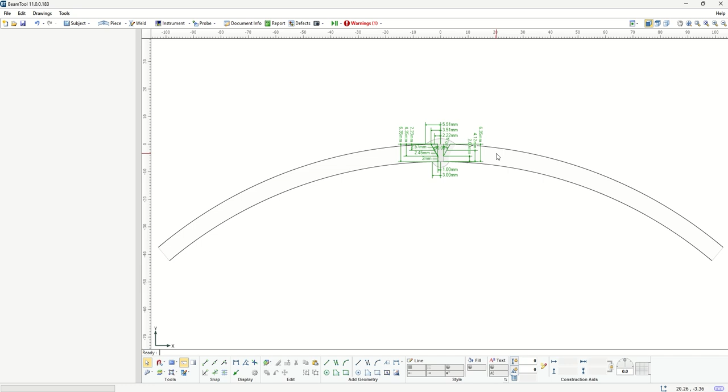In this video, we want to review together the preparation of the scan plan for phased array inspection of a single V weld in a thin wall axial piece, which can represent seam welds in basically small thickness pipeline.

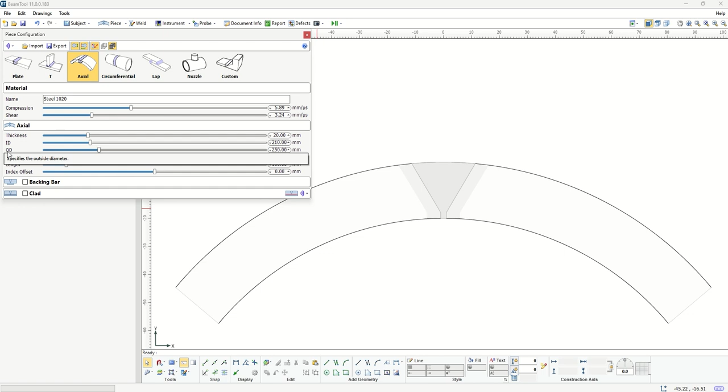As always, we're going to start by going to the piece and defining our piece. When we click on that, we have an option as a default to choose an axial piece. When we choose that, the dialog here will give us parameters that can help us to define our piece. Specifically for this example, I want to choose the OD, the outside diameter of my piece or pipe, to be 320 millimeter. And then I want to make it a thin wall, so 6.35 millimeter would be the

thickness. You will notice that when the outside diameter and thickness are set, the inner diameter is automatically set based on these two values. Next, there's a sweep here of 80 degrees. That basically is a choice of how much of this axial piece we want to show. For instance, I can go to 180 and show more, but in this case 80 degrees would be enough to show that it is a curved piece and will have enough room for my wedge to sit. So I'm happy with this selection.

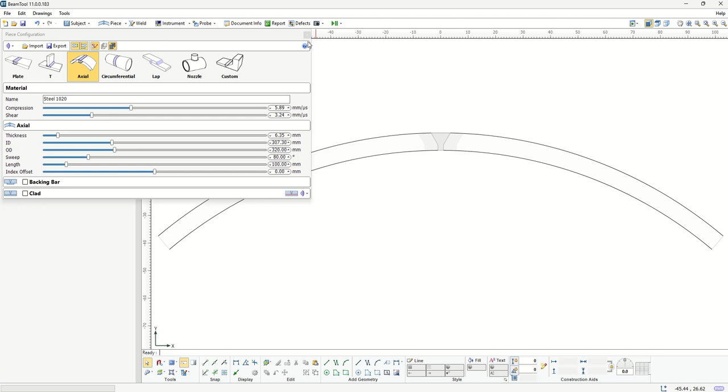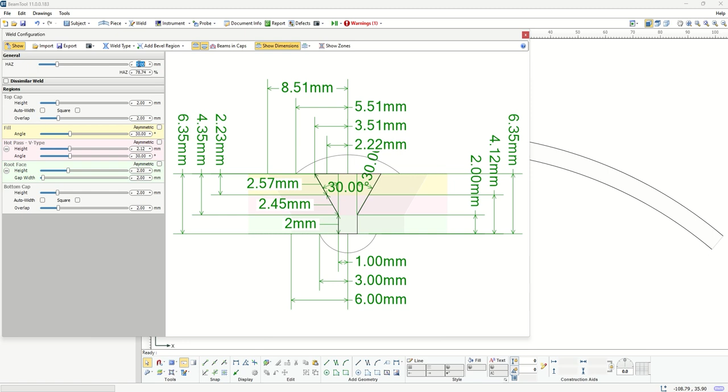Then I go to the weld, and in this case, I don't want to make many changes to the dimensions. I'm happy with the 30 degree bevel, and we have a 2 millimeter by 2 millimeter root. I can turn on the dimensions here so that I can see all the dimensions on the weld. But what I want to do is add a cap here, top cap and bottom cap, and change the overlap slightly. And also I want to modify the HAZ to be smaller, this gray area parallel to the weld bevel. So now that I've defined the piece and the weld, the next step would be to

add a probe. Here I add a phased array probe. The default probe and wedge that we always see in BeamTool appear here on the piece. But one thing you will notice is that it's already pinned to the OD of the piece. So it seems BeamTool already knows that you're inspecting a curved piece. The bottom of the wedge is curved, and you will also see here an option that by default the wedge is pinned to the OD.

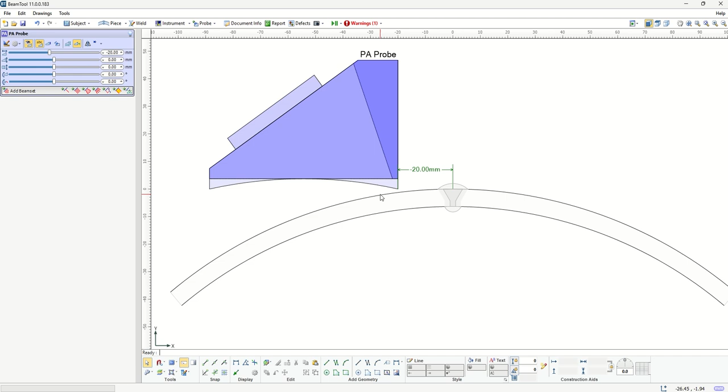If you select no pin, it's not pinned to the OD, but still the curvature underneath the wedge matches the curvature of the piece. So obviously in this case we will choose that it should pin to the OD. If we go to the details of the probe and wedge, again we have our default probe with 64 elements, pitch 0.6, and our wedge essentially has the same parameters as the default, but as mentioned before, now by default the bottom of the wedge is matched to the piece.

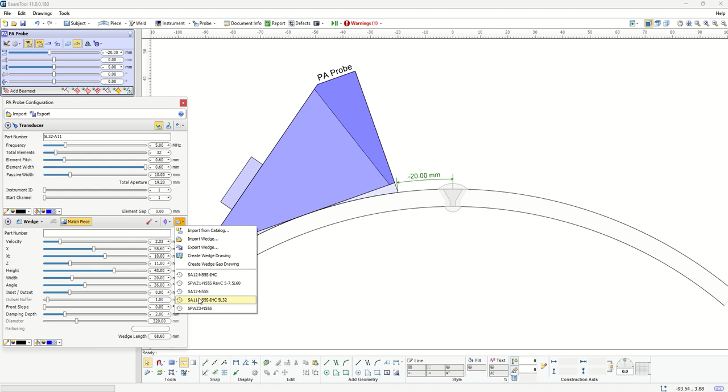So now, again, I can make changes to the probe and wedge. Since it is a thin wall and our weld is a small weld, I'm going to choose a smaller aperture probe. In this case, my choice is the 5L32-A11 probe from Evident, which is 32 elements, 0.6 pitch, and I'm also going to change my wedge to SA11-N55S. And again, you will notice that although the length is now smaller, the bottom is again curved.

Now, as usual, what happens next is to define a beam set. I want to choose a sectorial beam set again. If this was a flat piece, my train of thought would be that this is a 30-degree bevel, so I want to go somewhere around 10 degrees from the normal, and 60 degrees is normal to this bevel. So something between 50 to 70 would probably be good. But the first question that comes to my mind is: what am I actually specifying here?

When we had a flat piece, it was clear to us that any angle that we choose here for refraction angle will be with respect to the bottom of the wedge, as the normal to the piece was the same as the normal to the bottom of the wedge because they were both flat. But here, in fact, what is the angle that is being generated? What is the reference of that angle?

And that's what you will see a hint here: BeamTool tells you that the beams are being corrected for the curvature of the piece. Some instruments may or may not support this, or support it in a different way. If you have an idea of what instrument you want to use, this is an important thing to pay attention to. So if I click on more info, we can read a little more about this axial configuration.

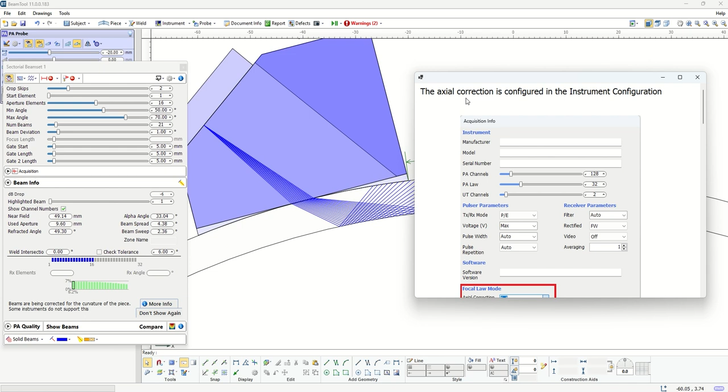In fact, in the axial configuration, we need to do beam correction based on the angle we choose and the curvature of the piece we have. The options for correction are no correction, full, or partial. This is with respect to the reference that has been used to generate the angle that we ask BeamTool to create.

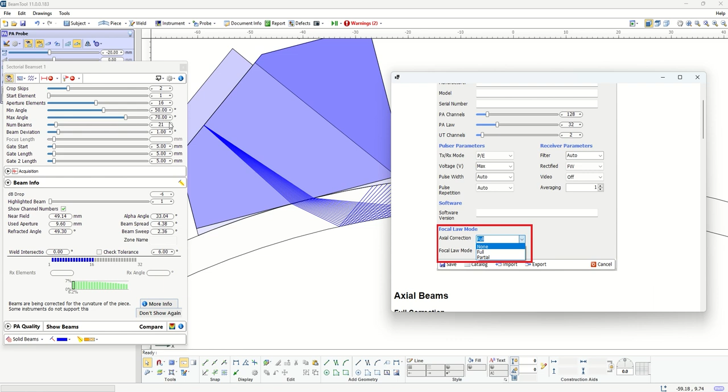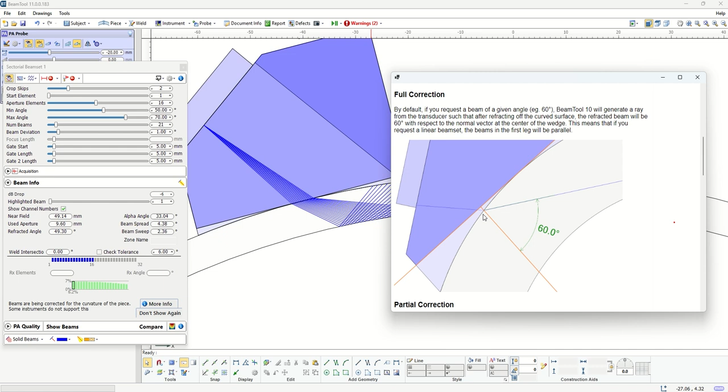With full correction, the reference will always be the flat line at the bottom of the wedge, and a normal to this flat face would be the reference. So if you say you want to create a 60-degree beam, BeamTool is going to draw a flat line to the extent here, which you also see in this image, and then with respect to the normal to that, your angle would be 60 degrees. Now, this is a little bit counterintuitive.

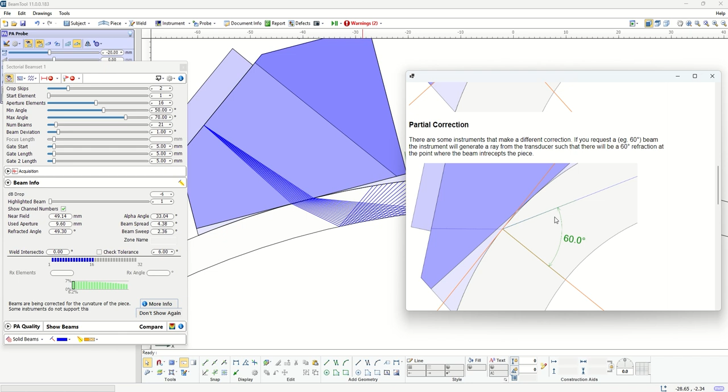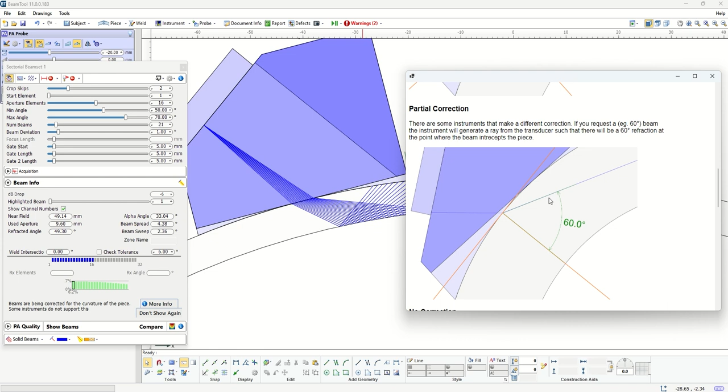What can be more intuitive, closer to what we expect from Snell's law, is partial correction, where the beam is generated with respect to the local normal at the surface. So if this is a beam exit point, we have a normal to the surface, which is a line along the radius of the OD arc, and our refraction angle would be with respect to that normal. That's what, in most cases, we prefer to use.

And no correction would basically pretend that this is not a curved piece, do all the refraction with respect to the bottom flat, and then just trace the beam into the curve.

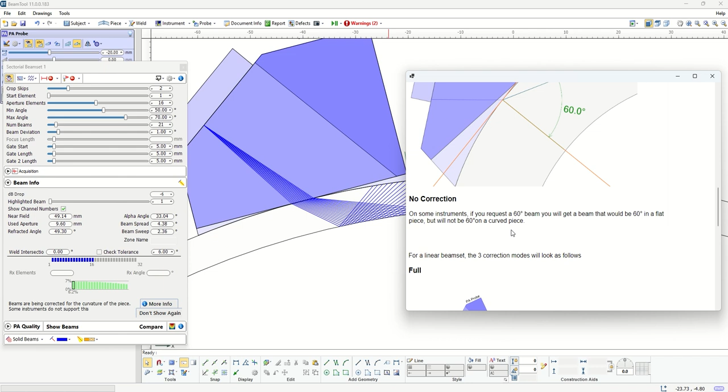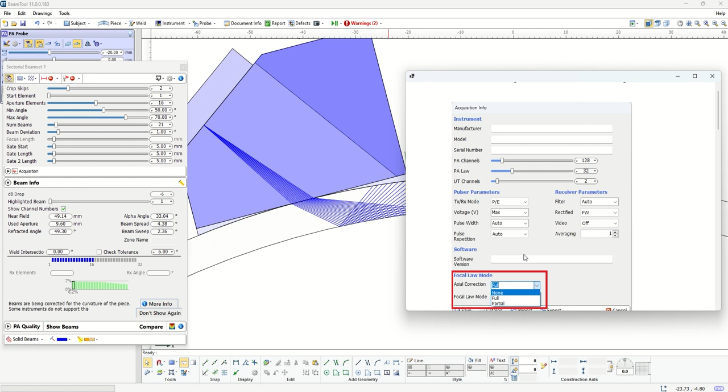Now, the thing that's important is to make sure that our instrument is aligned with what we want to do. So we need information on what is supported in the instrument you choose. If in that instrument you select the angles after you set up your scan plan, which of these scenarios is going to happen? Then you want to make sure BeamTool matches this scenario, so that when you do the inspection, you're actually getting the angle that you planned for.

To show this more clearly, here there's an idea of what happens if you generate, let's say, a 60-degree same-angle linear scan. If it's on full, your reference would always be normal to the flat piece. Obviously, those are all going to be parallel beams.

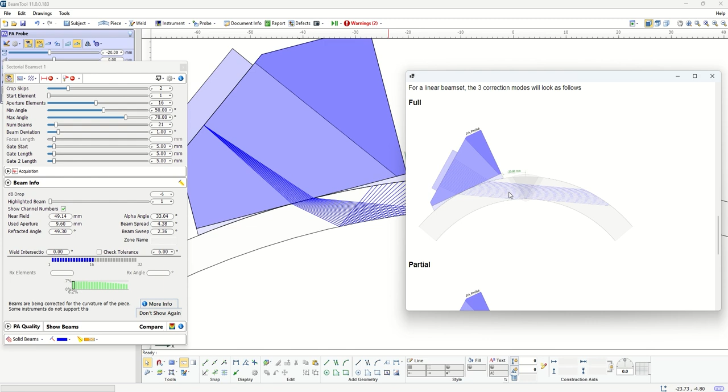But if it's partial, at every beam we look at the normal to the OD surface. Because the normals are different, although they're all aimed to create 60, 60 with respect to different normals would in fact create different angle beams in the piece.

And if you choose no correction, all the 60-degree angles are with respect to the bottom flat as if there is no curve, and then the beam is just traced into the curved piece and bounced from the ID and OD after each bounce.

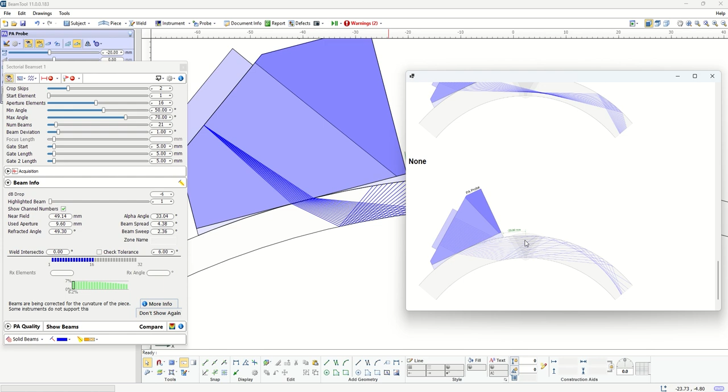So in this case, if I go to the instrument, my default on the beam tool is the correction on full, and for this example, I'm going to change that to partial and save. And you just notice that as I came out of that, my beams slightly changed.

Also, the next thing I want to do in my sectorial, I want to use the full aperture. So I just select the full element in my aperture, and here I can choose to display the elements that are generating my beams, which in this case would be all the elements.

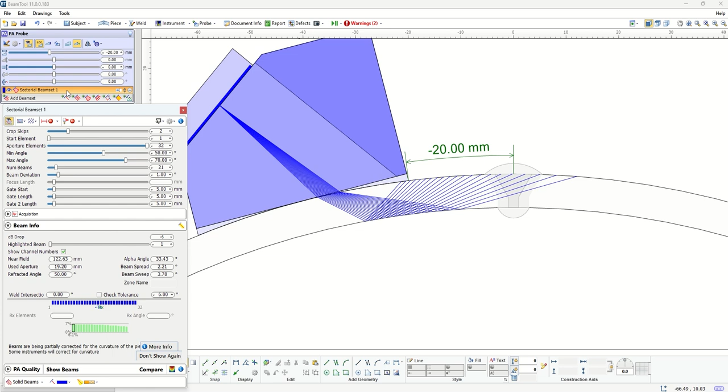Now, the next step here would be to make sure that I'm actually covering the bevel. So what I can do is to move my wedge closer. And here, as you noticed before, these are the tools that help us to move the probe, and here I can move. But one thing you notice is that now this distance is the distance from the front of the wedge to the weld center along the arc. So you notice that it's not a straight line anymore, it is essentially an arc line.

So that's the important thing, and the choice here is to make it easy for inspection, because typically when you have a curved piece, it's very easy to have like a magnetic ruler or something that you can easily mark along the curvature.

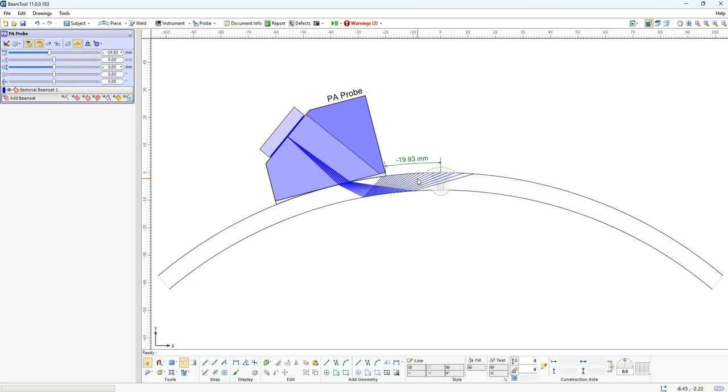So I can move this closer and closer until my beams essentially start to cover the weld. And if we have the information about the size of the cap, that can tell us how close we can get to the weld. And here in this case, it seems to be like a good coverage. I'll have some redundant angles at the beginning that I can cut so that I can just cover the edge of my HAZ, and on the other side I can increase my largest angle slightly to make sure I hit the opposite side HAZ and the root side.

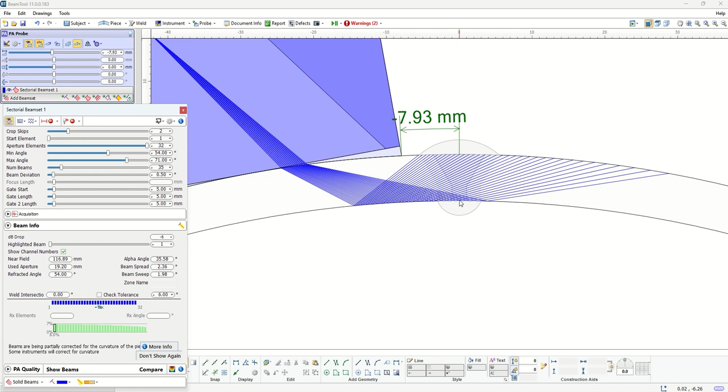But another important thing to note here is we talked about how these beams are being generated based on our choice when they come to the curved interface when they want to enter the piece. But they are also going to be reflected back from the inner diameter, basically the back wall, where each of these points would have a different normal as they are at different locations on the curve. So it's not really intuitive what we actually get after reflection.

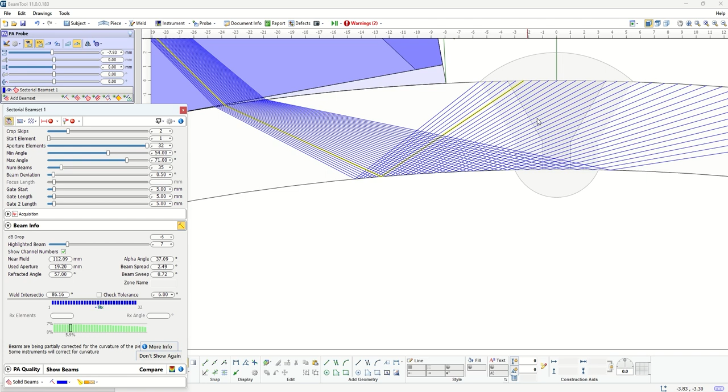What can help us though here is the beam highlighting tool that specifies all the information about the beam. Here, the information that's particularly useful is the angle of intersection with the bevel. Our goal here was to inspect this bevel with angles that are roughly within, let's say, 10 degrees of the normal. So we ideally want to hit this bevel at 90 degrees at all locations, but obviously that's not going to happen. But we want to be somewhere between 90 and 80.

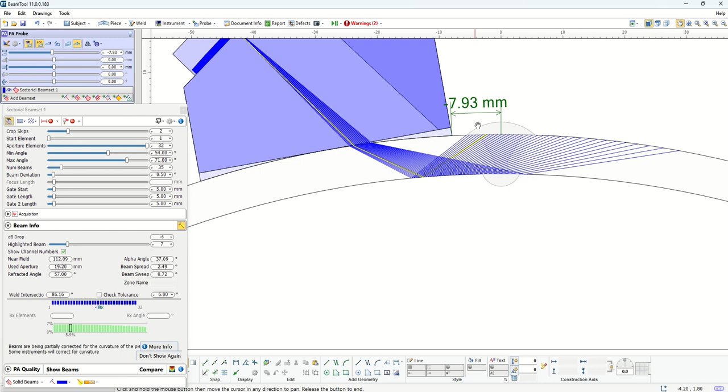And we already know that our beams are probably not exactly what we generated. We know that based on the option we chose they are 54 and 71 based on the normal to the curve. But after the skip, we really don't have any idea what the final angle that hits the bevel is. But this beam highlighting tool and this information is going to be helpful here. For instance, for the highlighted beam, it shows that the angle of incidence, what actually hit the bevel, is 86.16, which is really good.

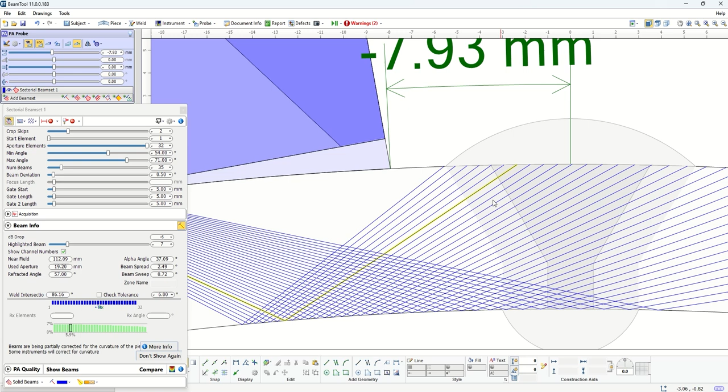To just confirm that, what I can do, I can come to one of these tools in the CAD tool and use the angle tool and go on the image and try to actually measure this angle roughly.

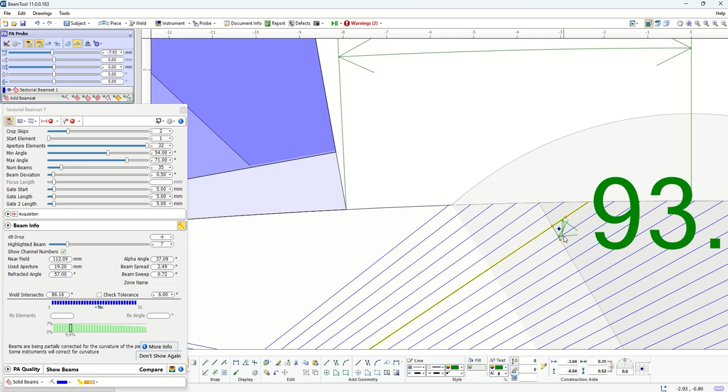I put the angle tool and try to put one leg on the bevel, and what I read is the angle that matches the intersection angle. Now, as I keep moving this to the different ones, you keep seeing that I'll have different angles. As I move this through, for the last beam that covers, I'm still within an 80-degree intersection, which is 10 degrees from the normal.

That tells me I'm covering the bevels with the correct angles. Now, the next thing to notice is that I may be tempted to increase this inspection to the third leg, with the logic that the same beams, after they skip from the OD, can also cover the bevel on the opposite side. Generally this is something people may tend to do. But one important thing to notice is that when we have a cap, especially a large cap, these beams will interact with the cap and will not be reliable after a skip.

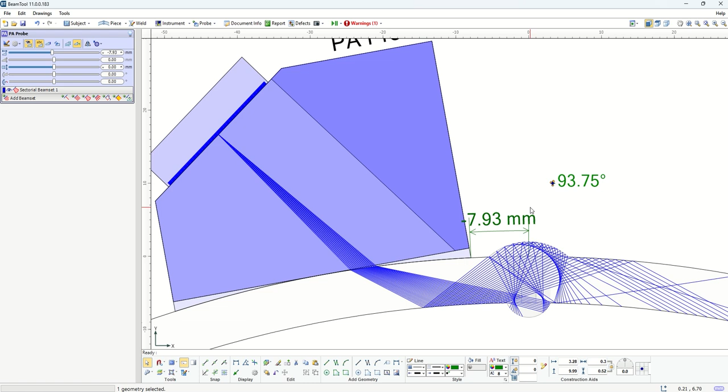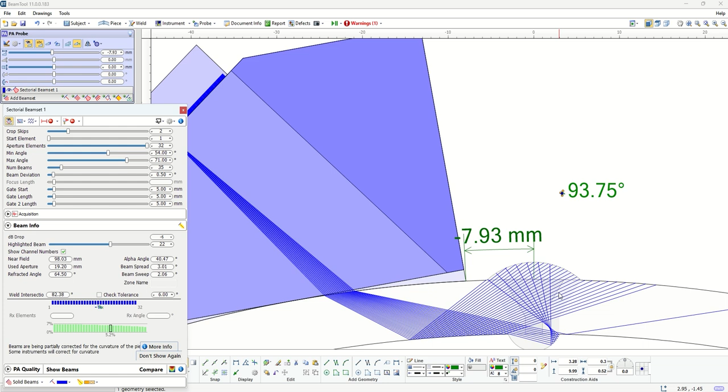There is a tool in BeamTool to actually show that. If you come to the weld and choose the option to project the beams into the cap, then your BeamTool acknowledges that the sound can propagate into the cap also. So here, if we go to the first leg, we see that some of our beams go to the bottom cap. If you go to the second leg, obviously the beams that go through first pass through the bevel, but then after they hit the cap, they again get reflected through the curvature of the cap.

Then we will not have the angles we thought we'd have to cover the bevel on the opposite side. So that hints that this should be a two-sided inspection. I'll just turn that off here.

Now, the last point I want to make is with respect to this technique we designed, but how we also translate the information of the wedge into the instrument we have. Typically it was easy because when it was flat, it was very clear what the height of the first element was with respect to — it would be with respect to the bottom of the wedge. But here, since there is a curve, the question is: what is this height defined with respect to? And that is another thing that is different across different instruments.

Sometimes in different instruments, when you choose an axial piece, by default they want you to define the height of the first element as a distance from the first element to the normal to the flat portion, or sometimes they want it shown with respect to the surface. Let's look into that using a single beam set.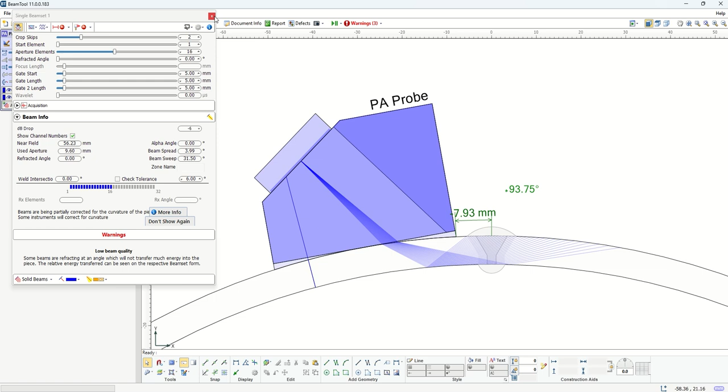For instance, if I just set this to 0, here what they may need is this whole distance. So for BeamTool to provide both options, you can come here on this side, and from this menu choose 'create wedge drawing.' When you click create wedge drawing, the wedge you have and use, the CAD drawing and dimensions, will all be here.

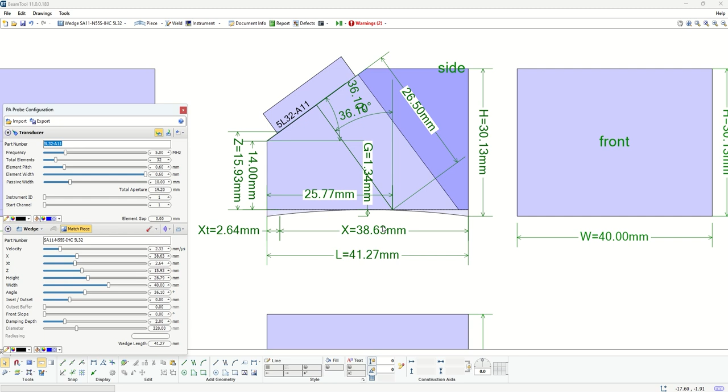One thing you notice now is that the Z, or the height of the first element in BeamTool, what you saw in the dialog before, is from the first element to the flat extent of this piece the way it's drawn. But some instruments will ask you to add that distance with respect to the bottom curve.

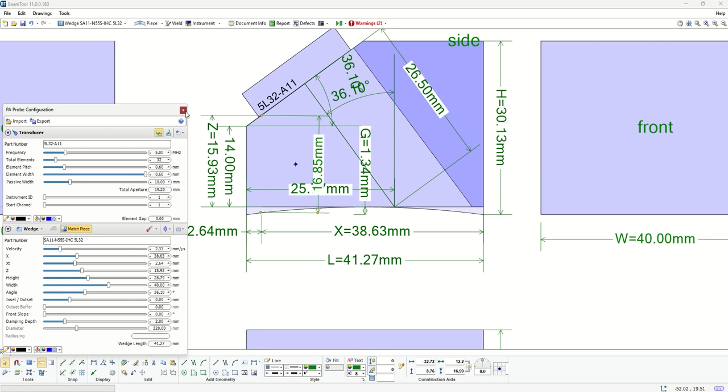That's why you can use the CAD tools to actually measure this distance. You'll notice that because of the curve, that would be 16.85 — so basically it's slightly larger, or the height is with respect to the bottom of the curve. This tool here would be helpful to make sure that when you define your wedge in your instrument, you're actually using the correct piece, the same as what you designed your scan plan for.

In the next videos, we'll go through the different pieces. Thank you.